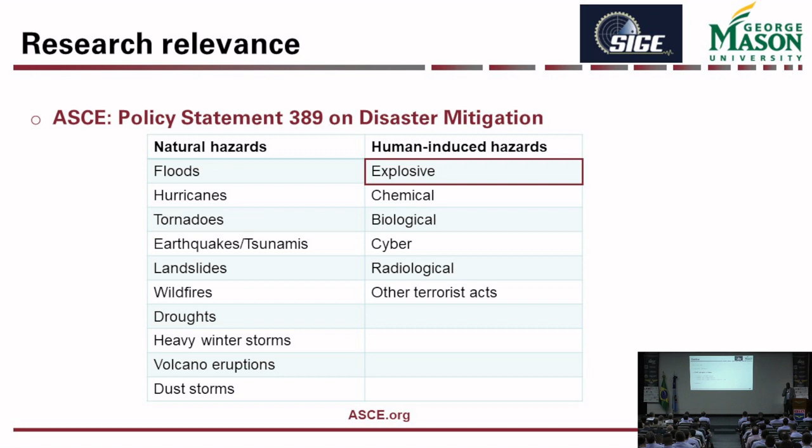Next I'll tell you about our underwater explosion research at George Mason. We've been working on this for the last 3.5 years. I'll use the word UNDEX instead of underwater explosion as shorthand. The project was funded by the Department of Defense, through a division called the Defense Threat Reduction Agency. The need was to determine high quality pressure data when we have explosions underwater.

At George Mason, we had a simulation platform called FEFLO, which has been validated for many years to capture the impact of air explosions on structures. The goal was to expand that simulation to capture underwater effects.

A little background about FEFLO: it was developed at George Mason University, with the main developer being Professor Rainald Lohner. Anything I present here, credit goes to Dr. Lohner, who is the original developer, though we work together on this project. FEFLO can model anything compressible or incompressible, and it has several equations of state, describing the relationship between pressure and volume for water, air, or explosives. The program was extensively benchmarked with test data, and our goal is to expand it for underwater explosion.

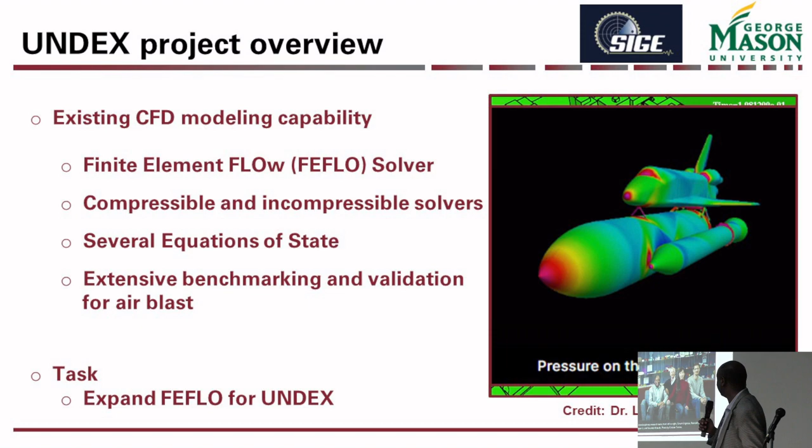So our task was to expand this for underwater situations. For this project, our research team has 2 professors, 1 postdoc, 1 PhD student, and 1 MS student. My PhD student, Jacob Sanders, isn't here, but we are 5 total, and all 5 of us were born on different continents. I was born in Africa, Professor Lohner was born in Germany, our postdoc Lin Chua Li was born in China, and Facundo was born in Argentina, representing South America. Jacob Sanders is from the US. So we have 5 different continents, 5 different people working together on this project.

So how did we start looking at underwater explosion? The first thing we did was look at whether we had the capability to predict how much pressure would be generated in a water body without any structure present, because you don't want to jump into studying structures without first understanding how pressure is generated just underwater. We call that the free field underwater case, where no structure exists, and I'll talk a bit about that next.

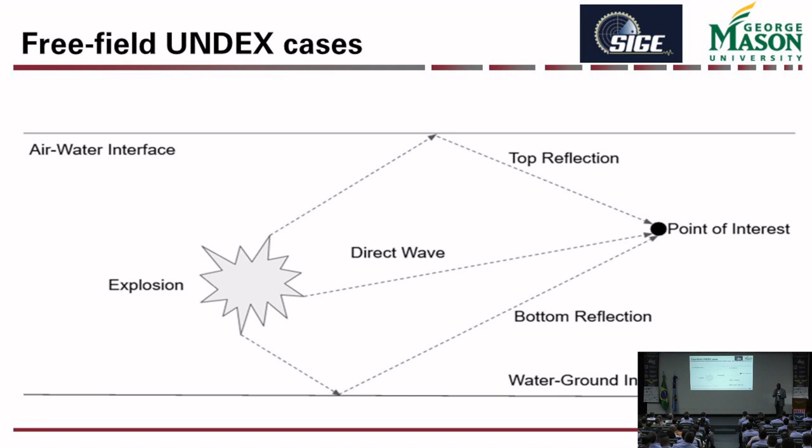So compared to air explosion, there is an additional layer of complexity when you're looking at underwater explosion. Later on, I'll show you our simulation for a free field case.

So how do you determine free field pressure? Well, you can do experiments. Some researchers have tried to do experiments in a very large water tank. They fill it with water, suspend an explosive, and put sensors at different distances to measure how much pressure is coming to the point of interest. We have also seen people doing tests in a quarry, maybe abandoned mines. They fill it with water, then put sensors at different distances to capture pressures.

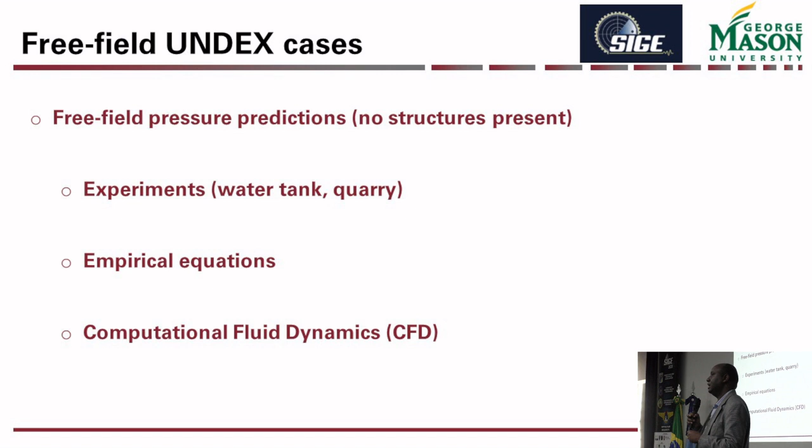Now, of course, there are some researchers in the old days who have done a lot of these tests and come up with what are called empirical equations that allow you to predict how much pressure you have just by knowing the explosive weight and the standoff distance. And nowadays, we also rely heavily on computer simulation - computational fluid dynamics, using equations of motion to model transports in the water body.

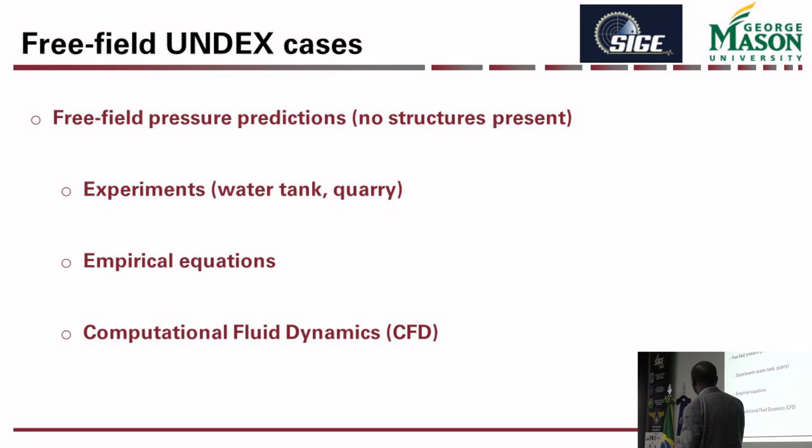So what we did first is we looked at existing literature. There's very good work done in South Korea by researchers Moon et al., relatively recent work. They tested underwater explosion in a 22-meter diameter tank, 15 meters deep. If you think about the size, it's huge - 15 meters is like 5 stories, more than 5 stories. What they did is put explosive at 5 meters from the surface of the water tank, then put sensors.

So they put sensors - this is the center - at 2 meters, 4 meters, and 6 meters, and they have quality data. So we used this data to initially validate our very preliminary computational algorithm. I'm not going to bore you with the mathematics behind it, but I'll show you some of our results.

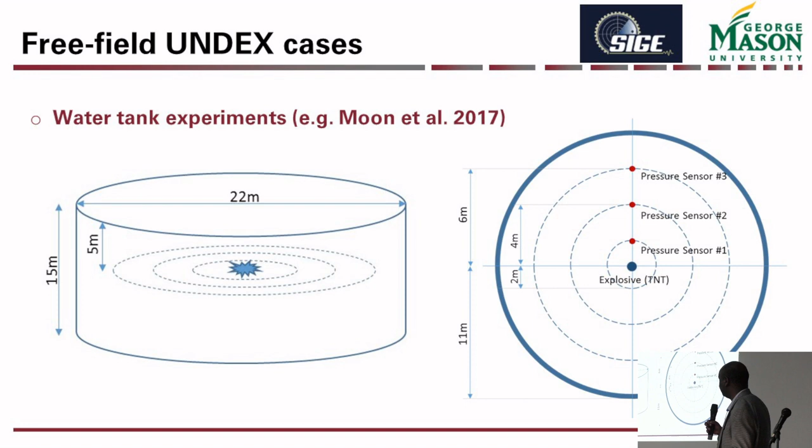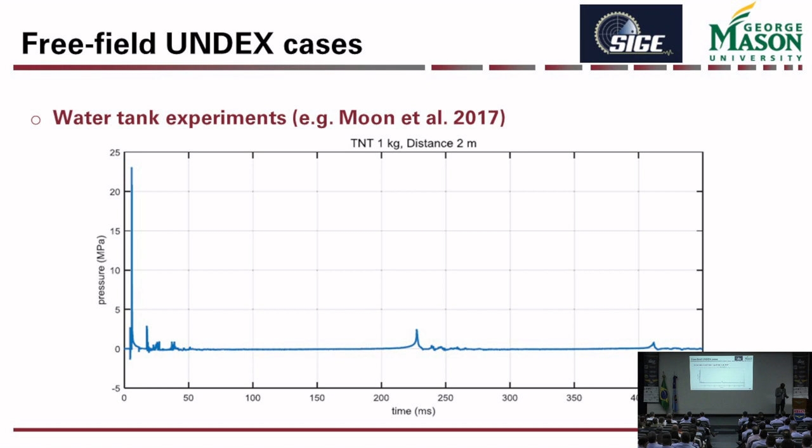Now, as you can see here, these are results for different distances at a standoff of 2, 4, and 6 meters. And clearly, as you move farther away from the explosion, the pressure will decrease rapidly. But I want you to remember some of these peak values: at 2 meters, our peak was 23; at 4 meters, about 11; and at 6 meters, we have about 7 megapascals. So still a significantly large pressure compared to standard atmospheric pressure.

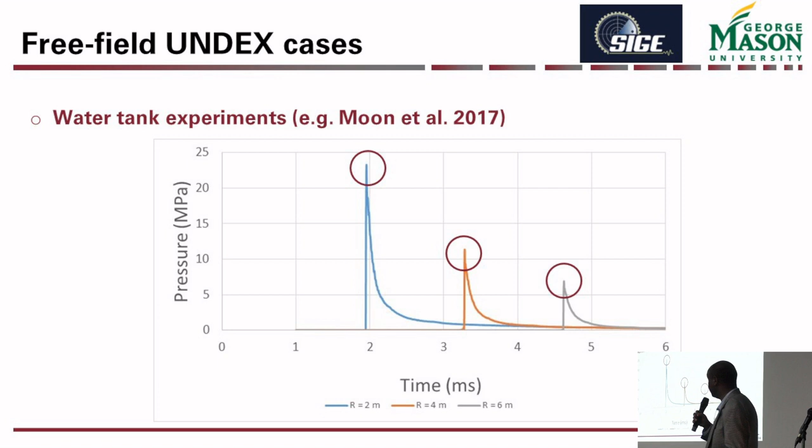We also looked at some of the tests done in a quarry. One of them that kept coming back, and was used to validate other computational programs, is called Kwon and Fox. What they did is fill a quarry with 40-meter deep water, then put a 60-pound HBX1 charge.

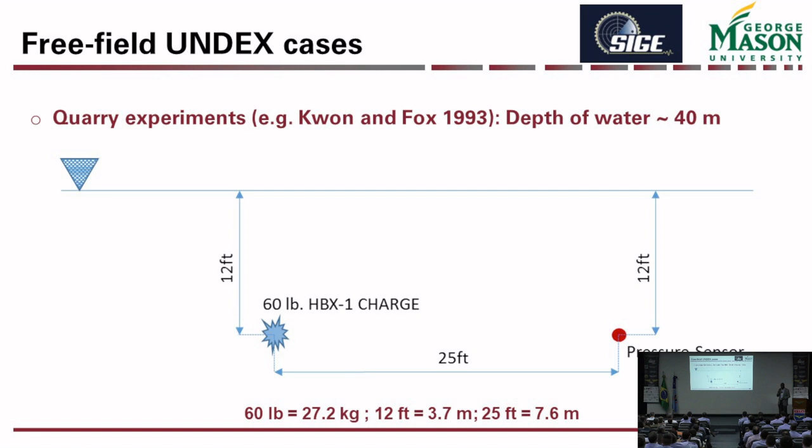Then they put a sensor 25 feet away. I'll give you the conversion units here since I know you use SI units. So it's about 27 kilograms at 8 meters.

It's about 16. We looked at empirical equations. There are empirical equations that say we have a peak pressure and it goes to 0 very quickly. So if we can come up with some very simple mathematical function, people can predict how much pressure the explosion is generating.

A very simple exponential function. It is a function of the peak pressure and a constant value for a decay.

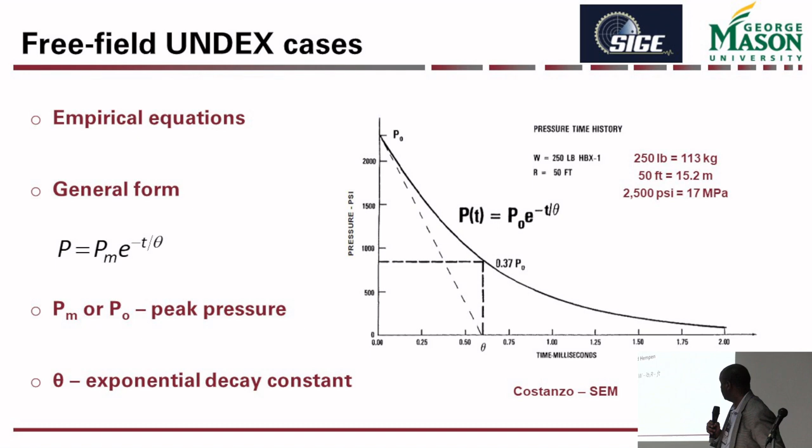Some of the empirical equations that we saw go back to 1964. There's a very famous literature by the guy called Cole. But there are also newer empirical equations if you start to look at literature. I'm here showing you just one of the equations from Cole. What Cole did is he did a series of experiments and came up with this equation.

So if you know your W, which is your weight of explosive, and R, the standoff distance, you can predict the peak pressure. And similarly, we have this equation called I. In the blast world, I is impulse. If you integrate the area under the pressure time history, you get an impulse time history. So how much energy is being delivered to your system is captured by your impulse.

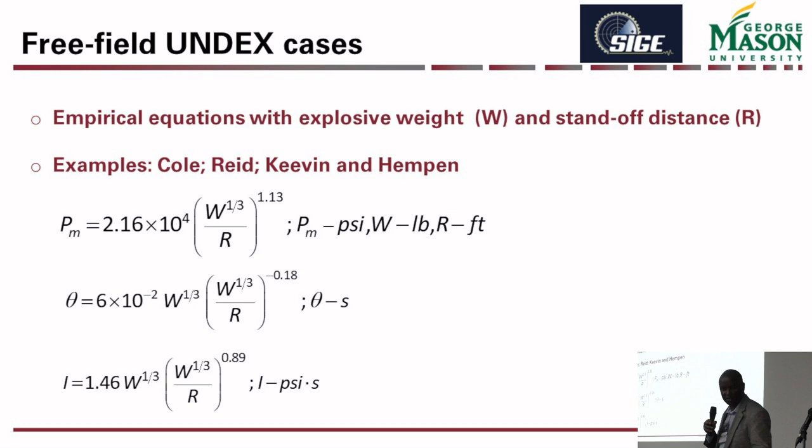So we did a very quick comparison between these experimental values and what the empirical equations are telling us. As you can see, this is coming from the Moon et al. large water tank experiment, and these three are from empirical equations. I think it's a very good prediction for an empirical equation, right? So like at 10, 10, 11, I think some of these empirical equations do a good job in predicting pressures.

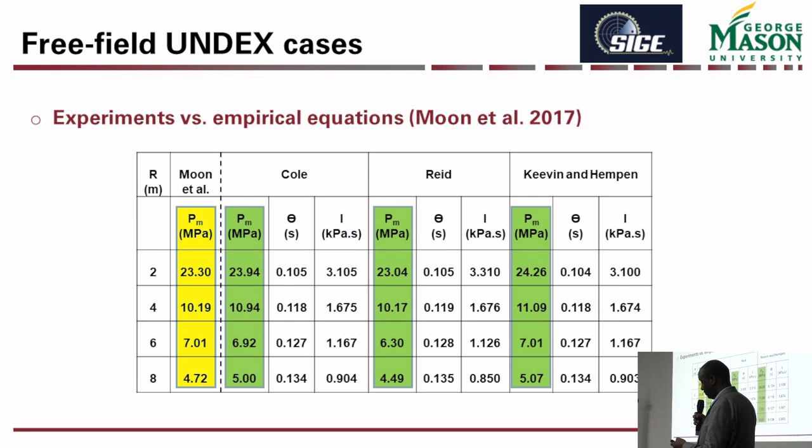We also checked the quarry results. The quarry results from Kwon, about 16 megapascals, whereas the empirical equations are predicting a little bit higher, again within 2 MPa.

So the reason why this is important for us is we didn't just want to expand our computational capability and claim that, oh, it works. We need to have some sort of checking whether our answers are correct or not, right? So it gives us some confidence in our computational simulation, which you will see later on.

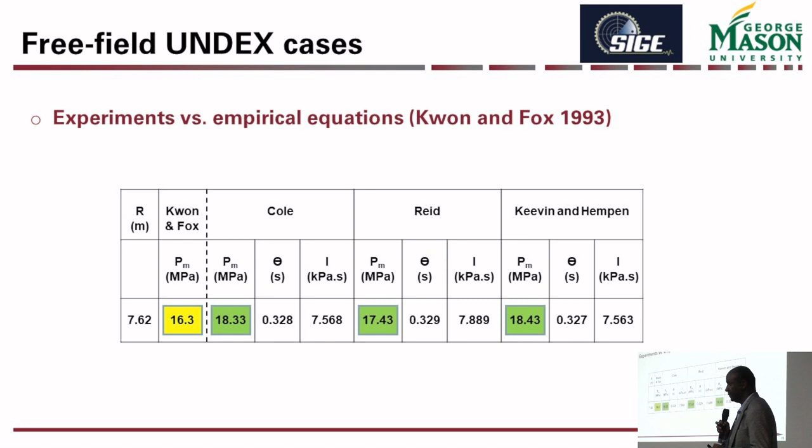So what we did really took us almost 2.5 years, and this was during the pandemic. Our postdoc, Lin Chuan, is very good with computers, and she did most of the programming and validating and testing to see if we can predict this in a 2D and 3D environment, because the empirical equations have their own limitations.

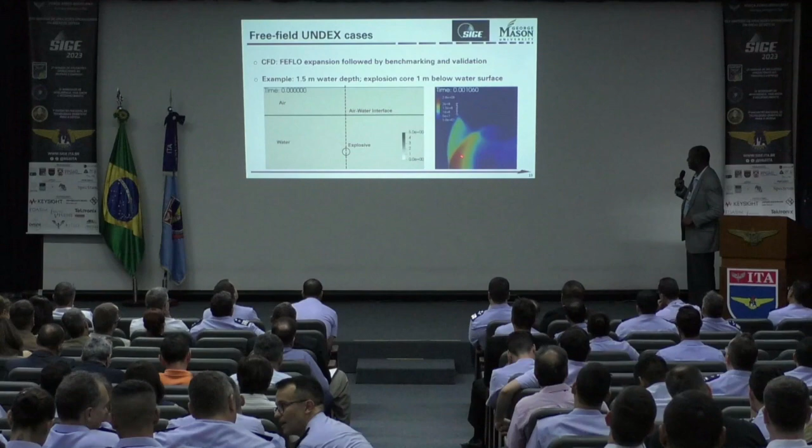Now, on the right-hand side, instead of showing you the blast everywhere, I'm going to cut the model halfway, and I'm going to show you only half of the result because of symmetry. So we're going to look at the left side of the pressure expansion. Again, remember this is an interface, here is air. The different colors are telling us the magnitude of the pressure.

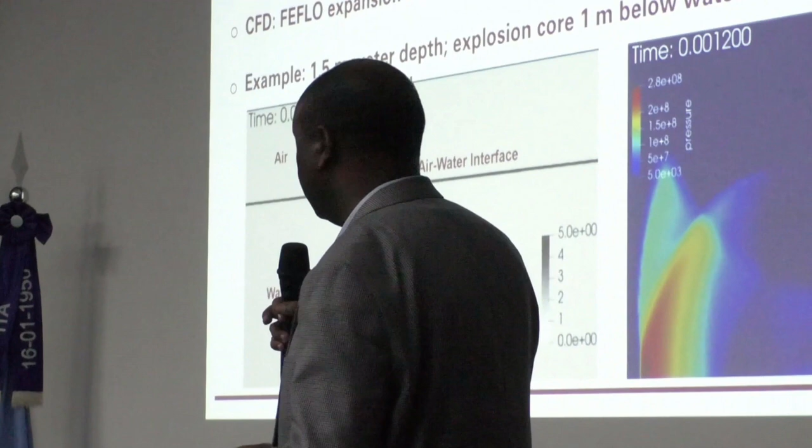So unlike the empirical equations, in our model we can do a lot of these simulations. We can check if those empirical equations work outside of the bounds. We can develop new equations by running many of these simulations.

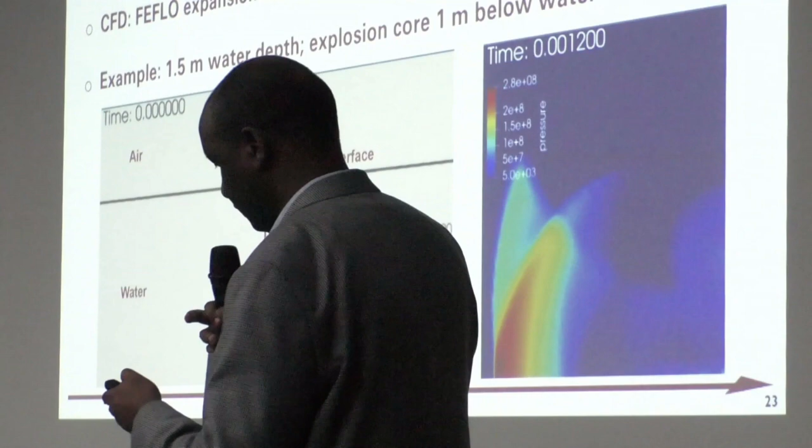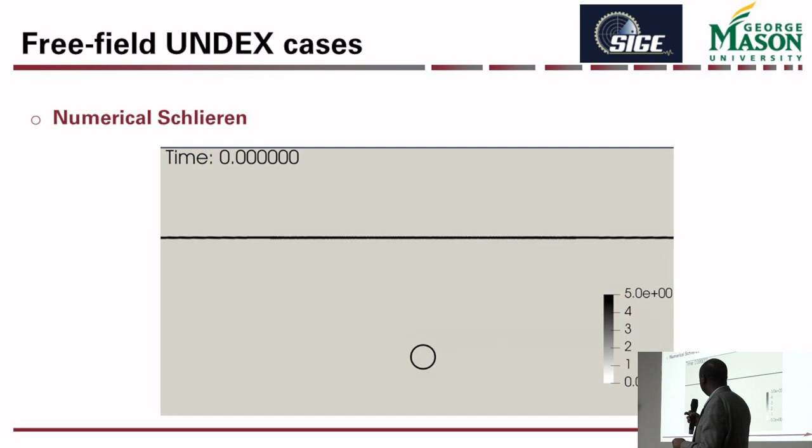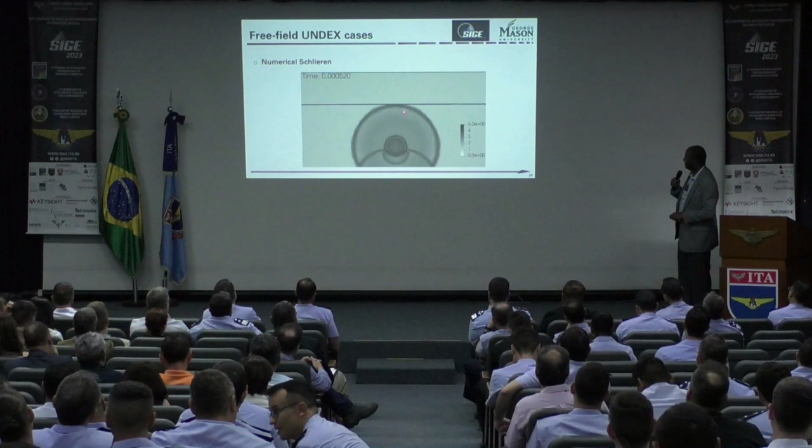But what is interesting for you to see, I think, is if you slow down the movie and look at how the pressure wave expands. So I'm starting out with the explosion here, and this is a nicer picture to show you that the pressure is reflected back, and the interface now comes down. A little bit will go to the air, but then it's a complex dynamics here, and that's all captured by computational fluid dynamics.

It looks nice, but really it took us more than 2 years to program these differential equations.

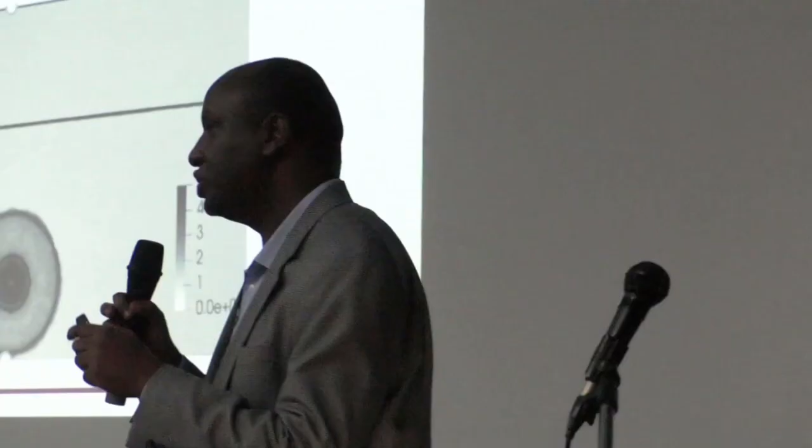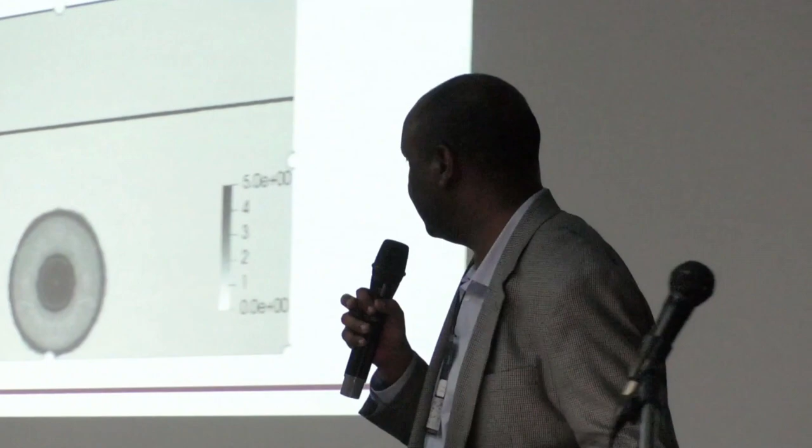And maybe a smaller, just if I show you a still picture, this is a radial expansion of the explosion, and it's about to hit the bottom floor, okay? And then the next one will be after it hits the bottom boundary. You can see that again, that reflecting back and going to the explosion core.

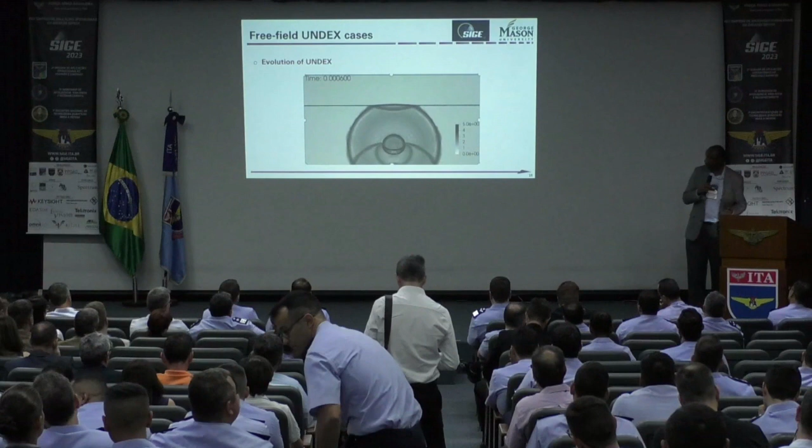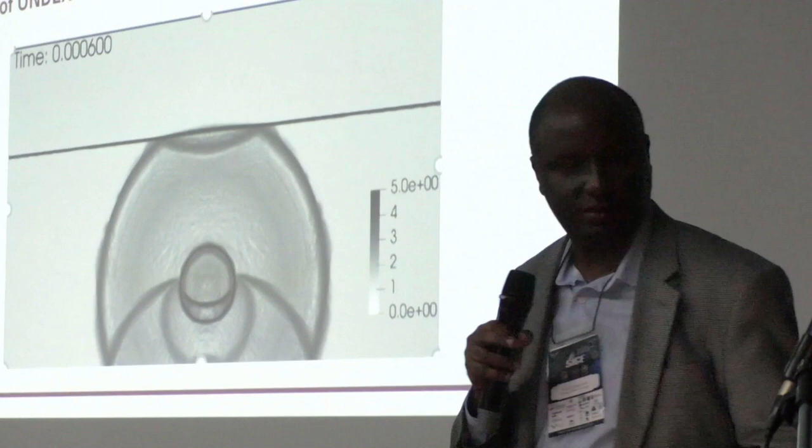And then the next still picture I'm going to show you is once it hits the interface, the pressure comes back down. A little bit will go to the air, but not a whole lot. And then here you see the continuation of different waves interacting within the core, outside of the core, and within the water, and some, now clearly you can see some pressure going into the air as well.

So once we felt comfortable, at this stage we felt comfortable that we have a tool that will allow us to look at underwater explosion, but what I have shown you so far is there is no structure, right? It's only pressure prediction. So the next step was we have to look into the interaction of a blast wave with a structure. And a structure could be a ship, it could be a dam, it could be a column.

But in terms of testing, we started out very simple models. And our project did not involve any experimental work. So we have to depend on published peer-reviewed papers. And we found out a very good paper that looked at the interaction of underwater explosion with cylinders.

So in this case, it's an 8-meter cylinder, 0.5 meter in diameter, and then the explosive was put at 0.25 meter. The researchers are Nguyen et al., and they use 8 kilogram TNT very close to the cylinder. So the pressure values, as you can imagine, would be very, very high.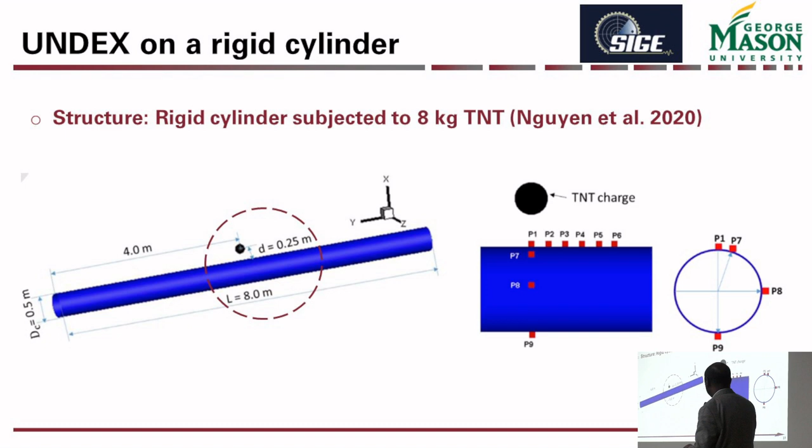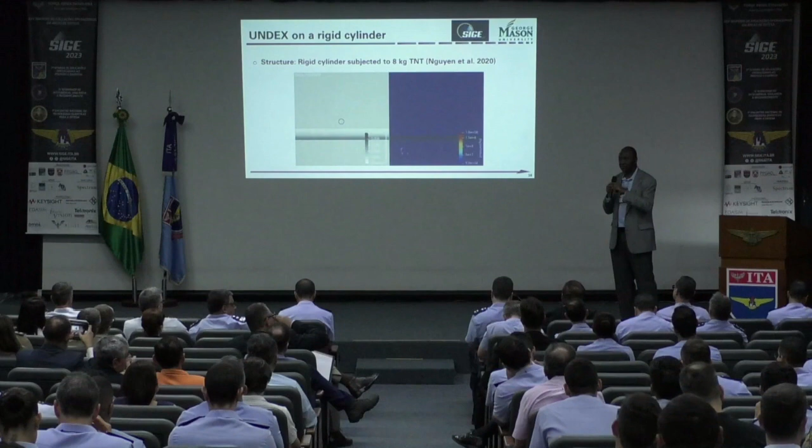So what we did is, they did the test, they have the pressure time histories. We used our model and we ran this simulation, and then we have our numerical stations exactly at those locations. We put 9 stations, and we measured our pressure, compared it to Nguyen et al.'s pressure. And this will show you a quick video.

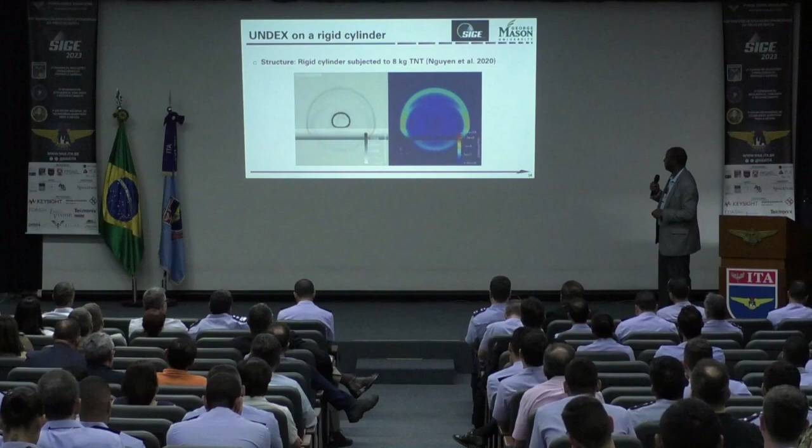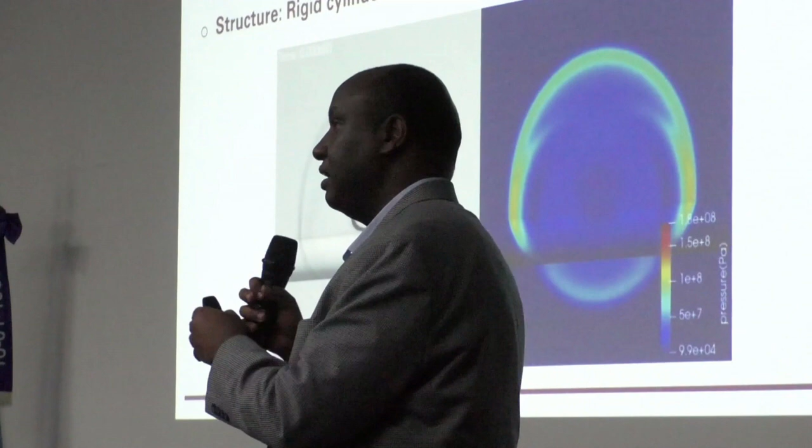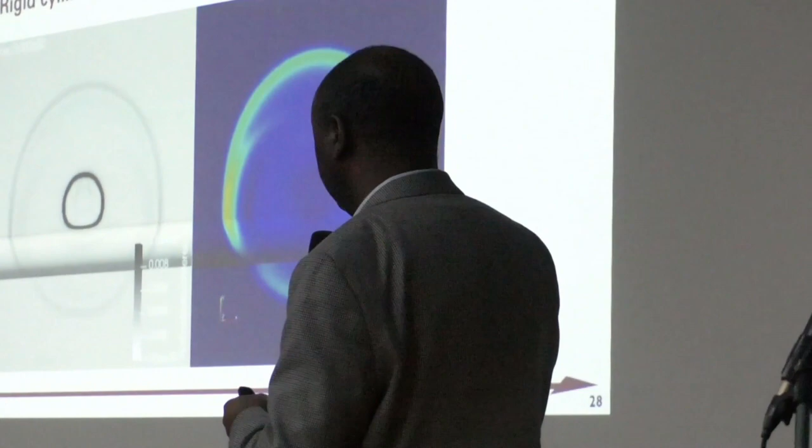So again, the left one is easier to see. It's a camera trick, we call it Schlieren, whereas the real pressure is on the right-hand side. So again, we can freeze this in time. We can measure, for example, Nguyen et al. reported pressure only at certain locations where there is a sensor. In our simulation, we can look up pressure at any point that we want. So again, computational fluid dynamics gives you a lot of power in looking at the different physics of the phenomenon.

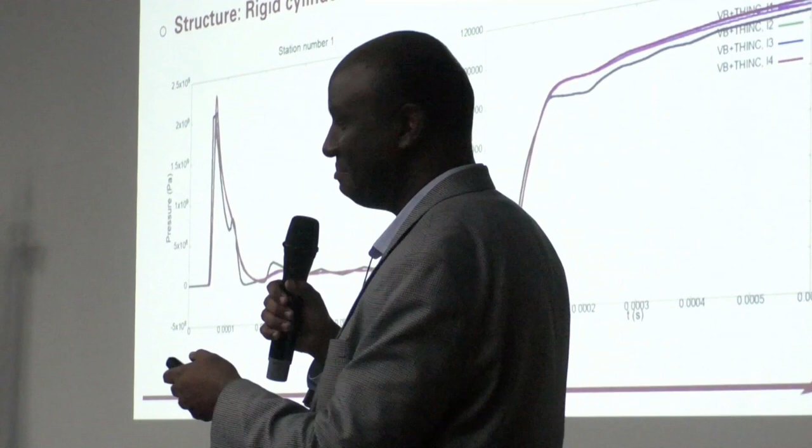Just to show you, I'm not going to show you all 9 plots. It will be boring, you'll be looking at the same plots. But a couple of interesting places - of course, the first one would be station number 1. That's directly below the explosive.

And as you can see, the pressure is tremendous, it's about 200 megapascals. But remember, this is 8 kilogram at 0.25, okay? Now you may see, well, you have a lot of graphs. The one in black is what's coming from the literature, and these 4 plots are showing our 4 simulations when we're validating what we call the number of elements, or the size of our mesh, for running this model.

But again, our prediction was pretty good compared to - again, we didn't do this test, we're using a test that's already done. So we felt our results are reasonably good. On the right-hand side, what you see here is the integration of the pressure time history. It gives you what's called the impulse - that's the total energy delivered in your system. Again, a very good comparison from the literature.

I'm showing you another one at station number 3. Remember, station number 3 is 0.1 meters away, so it's at 0.2 meters away. You start to see a reduction in pressure, from about 220 megapascals, now about 150. So as you're farther away, the pressure will be smaller, and also the impulse will be smaller.

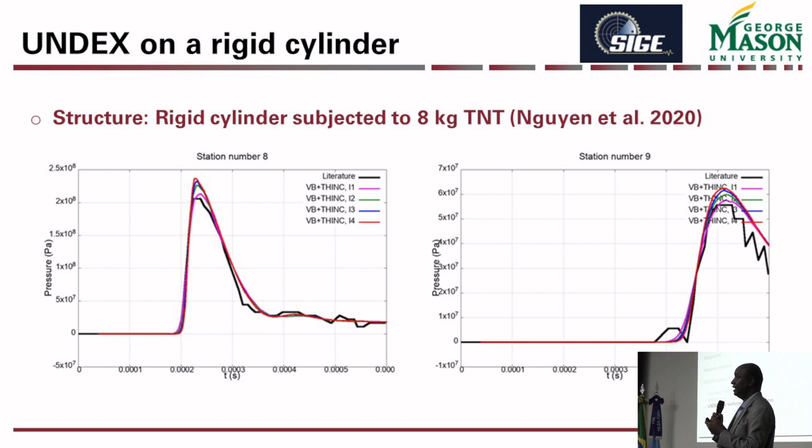So this gave us confidence that our tool can analyze an underwater explosion subjected to a cylinder. But this cylinder has a unique property. And what our goal was at the end of the day was looking at reinforced concrete columns, and I'll explain why we're looking at that.

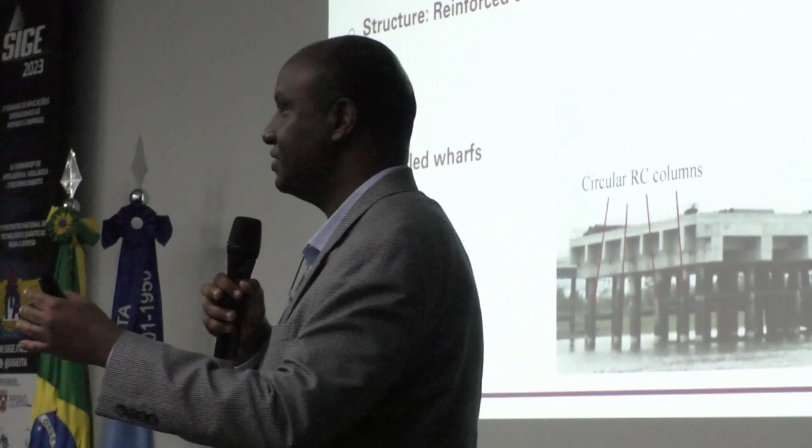So if you think about high-piled wharfs near our ports, they are usually very easily accessible. So if people want to do harm to this type of structure, it's actually very accessible. So we're tasked to generate pressure time histories for different configurations of reinforced concrete columns, circular columns, rectangular columns, and also at different standoff distances, different explosive weights, different depths of detonation. You may have a detonation near the air-water interface, or at some distance within your water body. So the whole idea was to generate a matrix of pressure time history values for different combinations of the items I talked about.

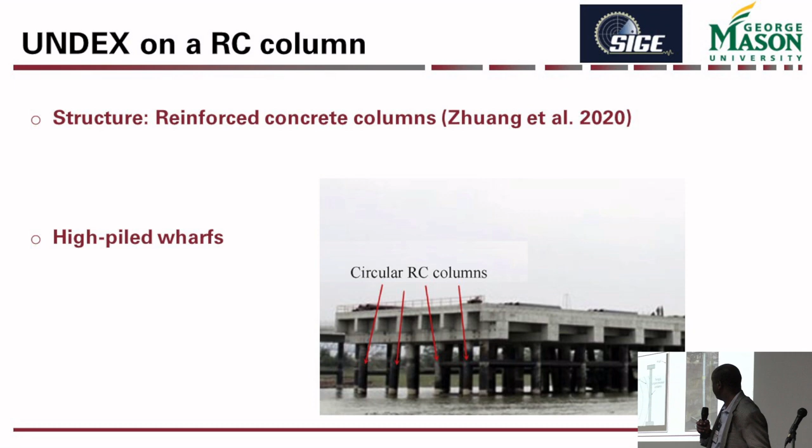So for this particular case, what we did is we looked at one data set that's already peer-reviewed. These researchers did a test in a water tank, 10 meters in diameter and about 3 meters deep. They put a simple reinforced concrete column, filled the tank with water, and detonated explosives. But these are very small explosives, on the order of 1 kilogram. So we have this test data available for us.

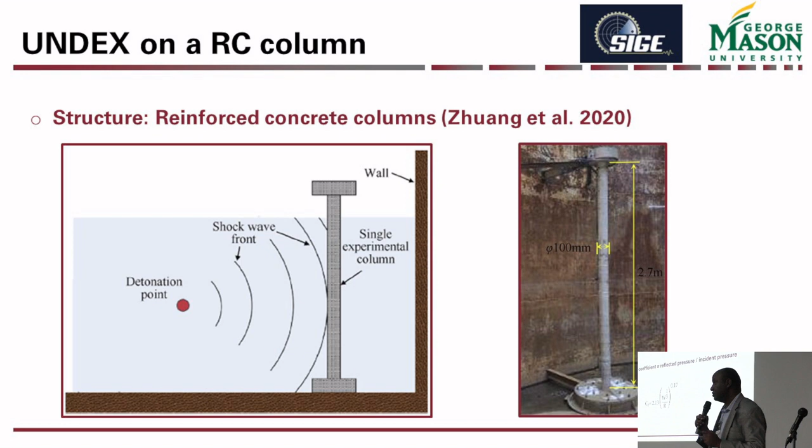And also, because now they have a structure, they calculated what's called a reflection coefficient. Whenever you have a structure, the pressure will significantly increase compared to a case where you don't have a structure. It's counterintuitive, but what the structure does is, the pressure comes, gets reflected back, and the shock event is also happening in a tank. So you have more shocks summing together and hitting your structure again, a lot of reflections coming. This is reported in the literature, so we have at least some guidance to check if our work is correct or not.

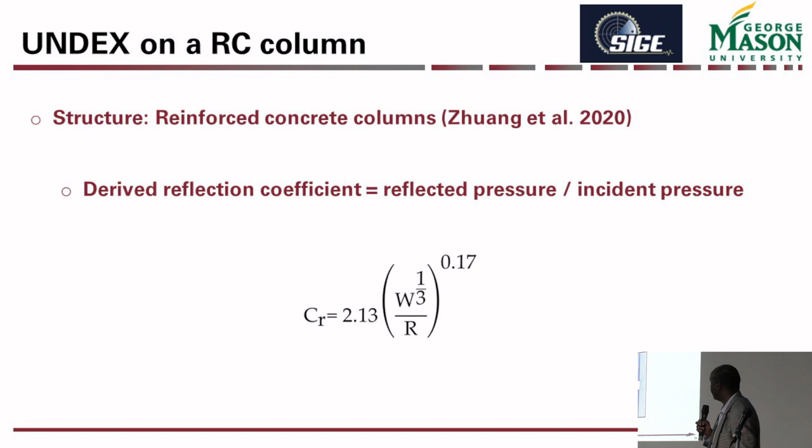This is one of our models, where, as you can see, it's very hard to see here, but we have a column. Can you guys see the boundary of the column here? It's a circular column. And then we have an explosion at 50 centimeters from the face of that column.

So as the explosion detonates, we're able to calculate our free field pressure. And then when the explosion hits the structure, we measure what's called the reflected pressure. So our goal is to see what our simulation says about the reflected pressure divided by the free field pressure, and compare it to the literature available in Zhuang's test.

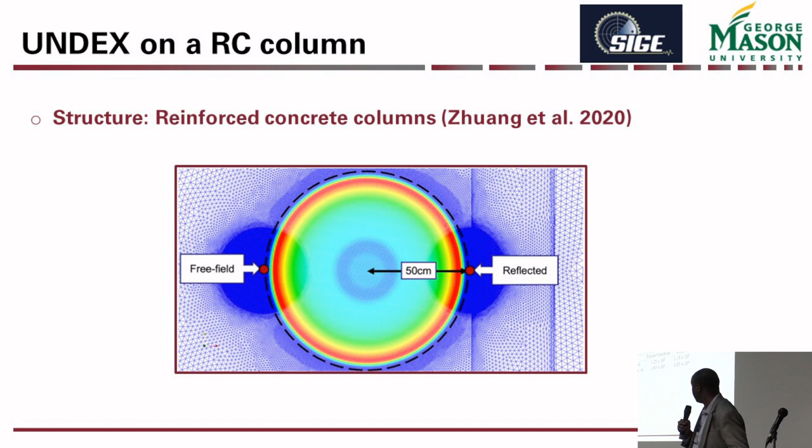So some of our comparisons are pretty good. This is our result. Remember, at the free field, we can use empirical equations. This is the prediction from an empirical equation. They're very close to each other. So we're relatively happy with our findings here.

Now, when we put the structure, which is the column, again with 1 kilogram explosive at 50 centimeters, our method shows that the reflection coefficient, meaning reflected pressure divided by free field pressure, was about 2.1, whereas Zhuang's experiment says 2.4. So our prediction was a little bit lower, but the challenge is, we did not do this test to say Zhuang is correct or not.

We didn't do our own test to see if we'll be getting 2.05, but again, very close, without having our own experimental data to validate this work yet. So relatively close ratios between the two.

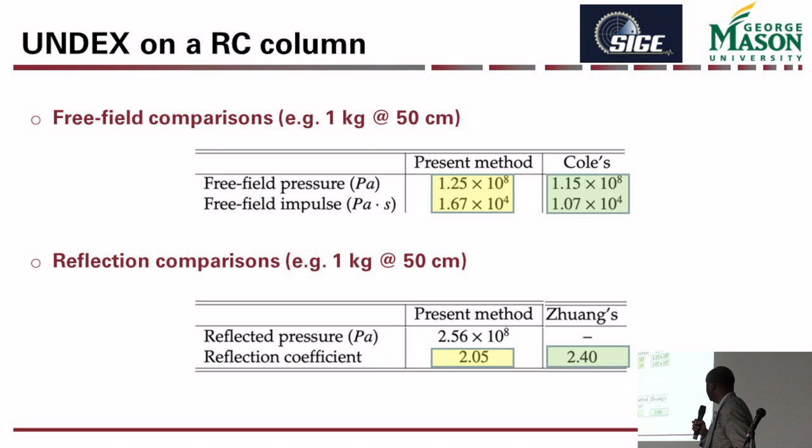After that, we felt very comfortable that we can run simulations on steel plates or reinforced concrete columns. Here is one example for you that shows a good movie.

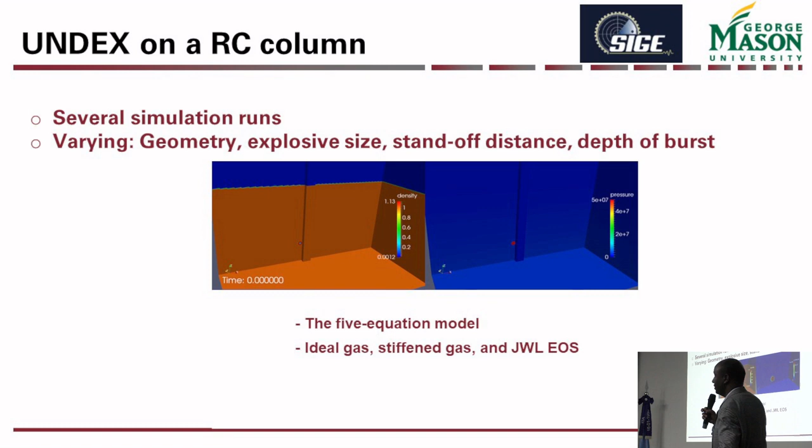On the left-hand side, what you see here is simply the density—the red you see is water, which has a density of 1 gram per centimeter cube. Then what you see here is air, and down here there's an explosion starting. On the right-hand side, it's simply showing you the pressure generated at different points within the medium.

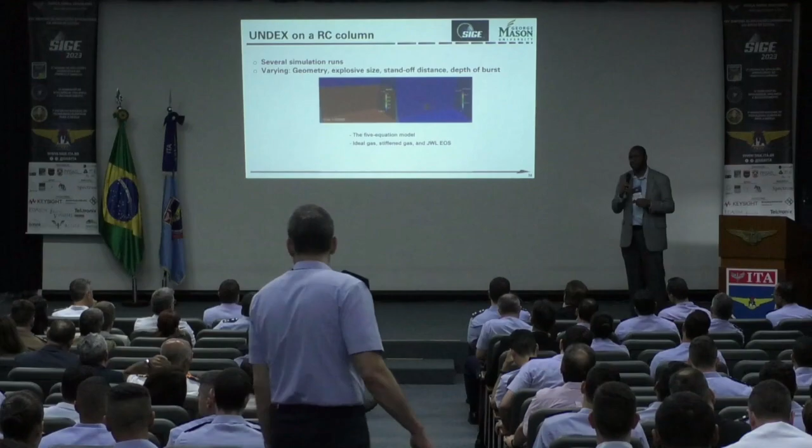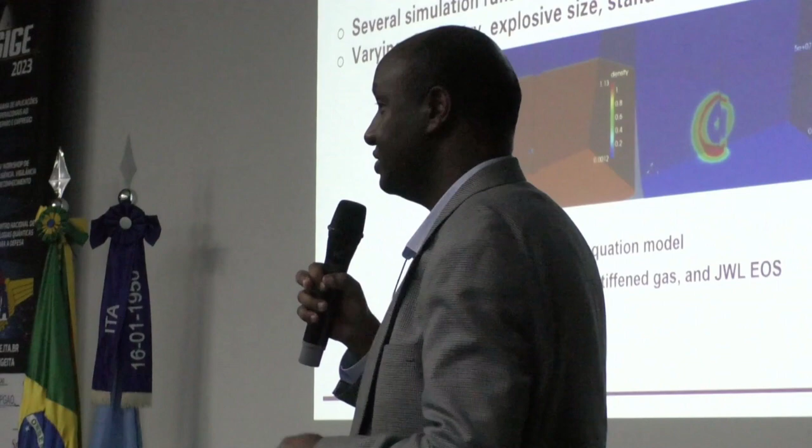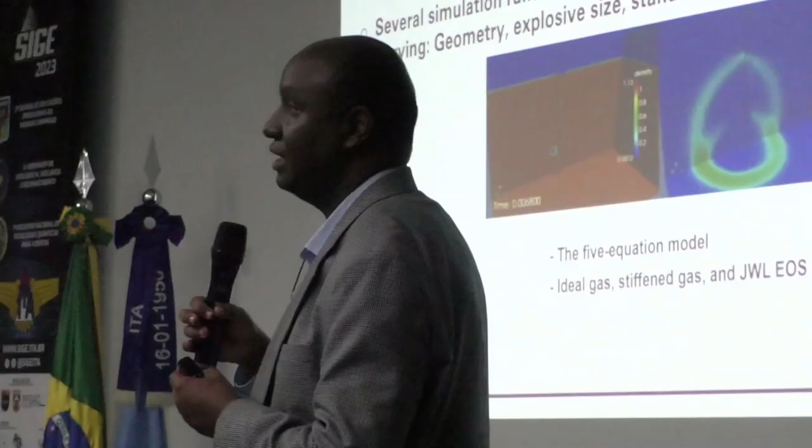For those interested in the mathematics behind it, there's a model called the 5-equation model: conservation of mass, conservation of momentum, conservation of energy, and then we have to come up with equations of state. Different equations of state for the explosion and for the gas, because when the explosion happens, gas is generated, so we need an equation of state. For the explosion itself, we have a famous equation of state—at least on the US side, we use JWL, Jones-Wilkins-Lee model. It's heavily documented in literature.

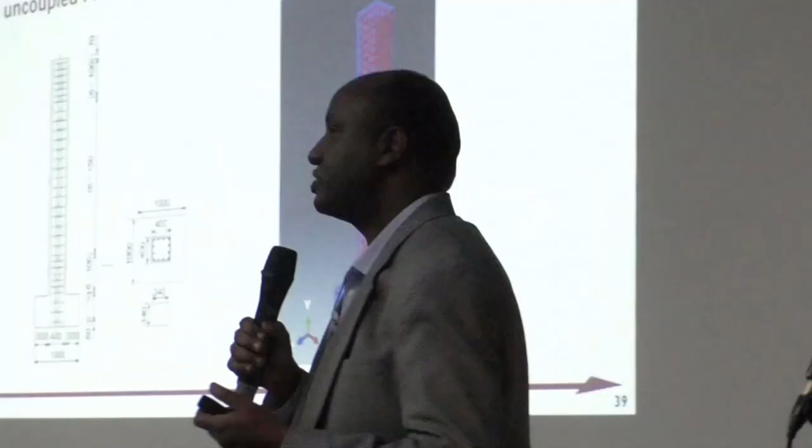So you may ask, okay, you have all these pressures generated, but what is the value of having those pressures? Well, at the end of the day, I have to be able to assess whether that pressure is causing damage on my structure or not. So once I have pressure, I have two options.

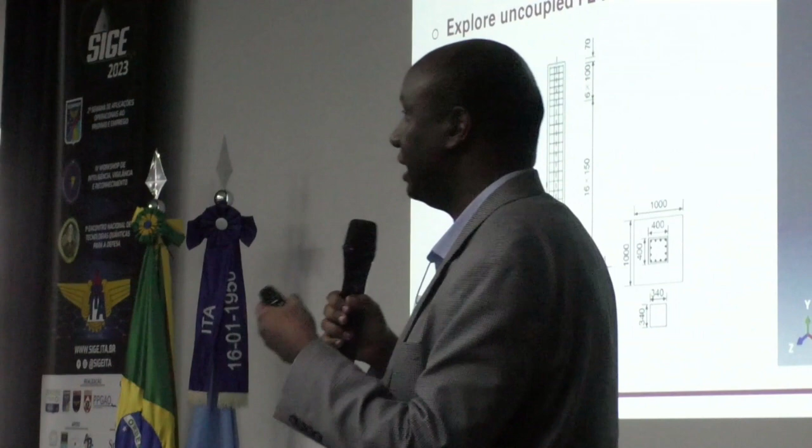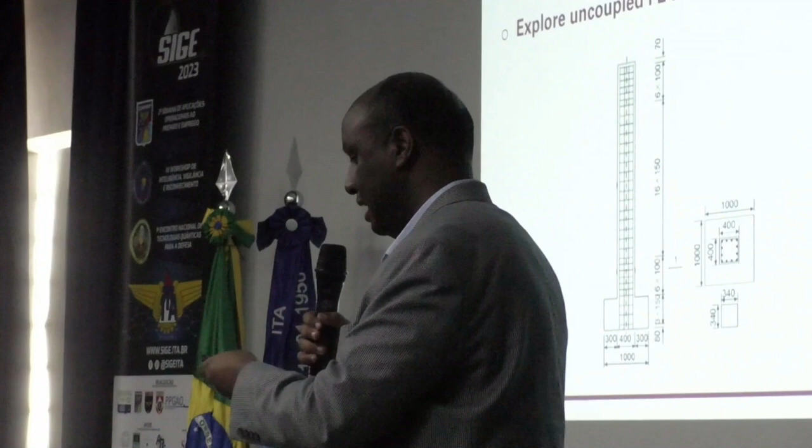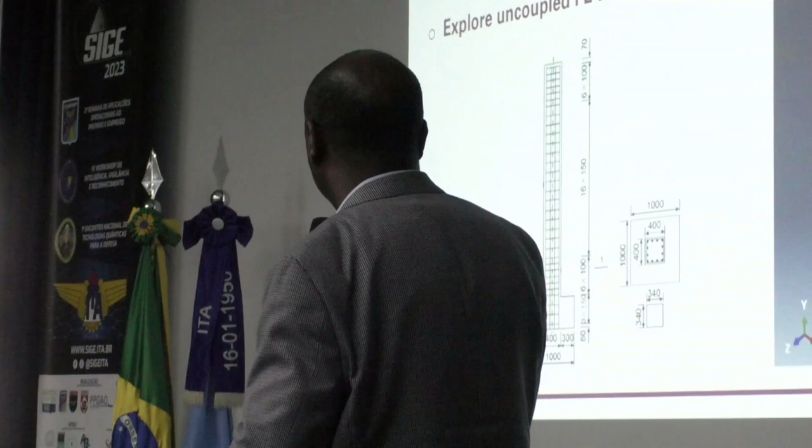I can take that pressure and take it to another program heavily focused on structural response—in this case, we explored a program called Abaqus. So we took our pressure and put it into Abaqus to see if this column, for example, is surviving that particular blast event. This was not required by our sponsor, but we advise the students to do additional work to challenge them.

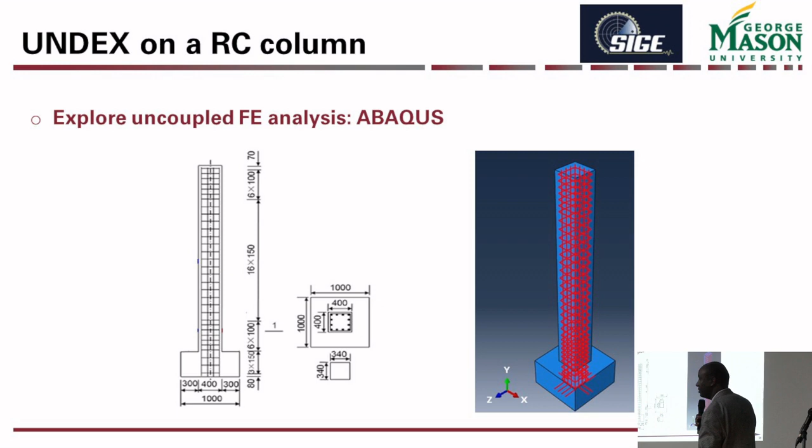In this particular case, you see a very simple reinforced concrete column. We try to model it as exactly as it's built—you see the vertical reinforcement and stirrups.

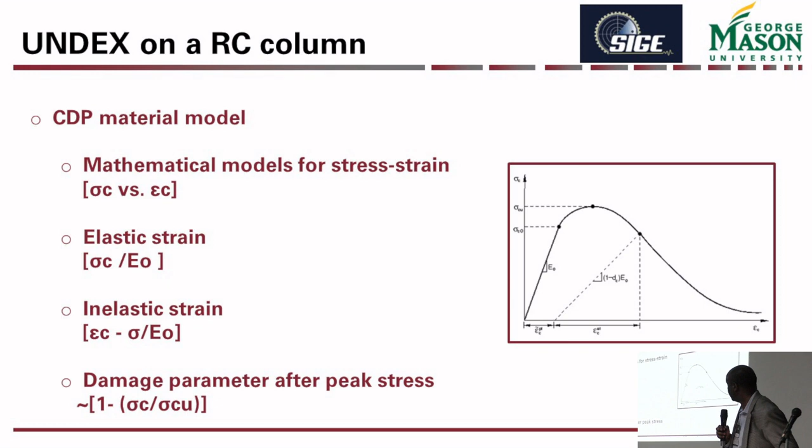Our typical challenge in looking at structural response is understanding the behavior of concrete when it's subject to dynamic loads—how does it respond? This is the stress-strain diagram for concrete. We do a little bit of study in our computer simulation to see how strong the concrete is, how it fractures for a given compressive load. That gives us the compressive strength of concrete.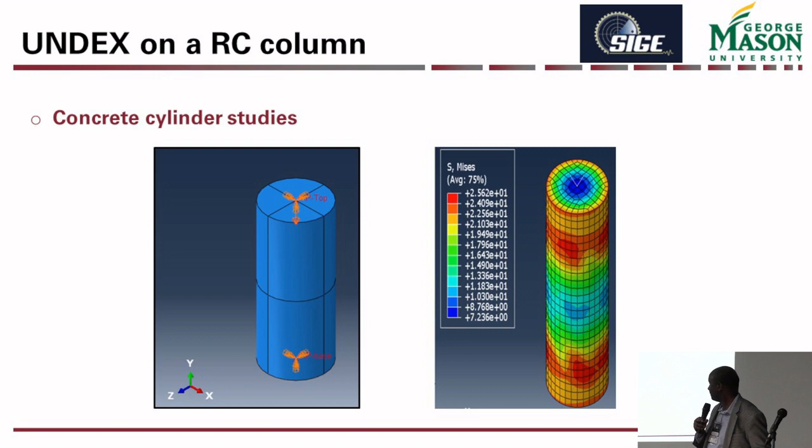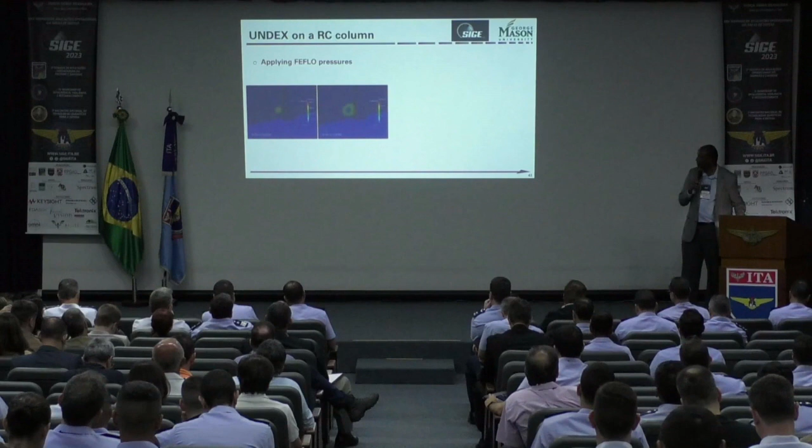Once we determine that, we have the ability to relate it to other parameters we need for our simulation. And then, once we are comfortable with our material properties, we run our FEFLO pressures at different times. This is one example for you. We have the ability to capture this pressure in time and space, and transport it to the structural software, and this is a preliminary result.

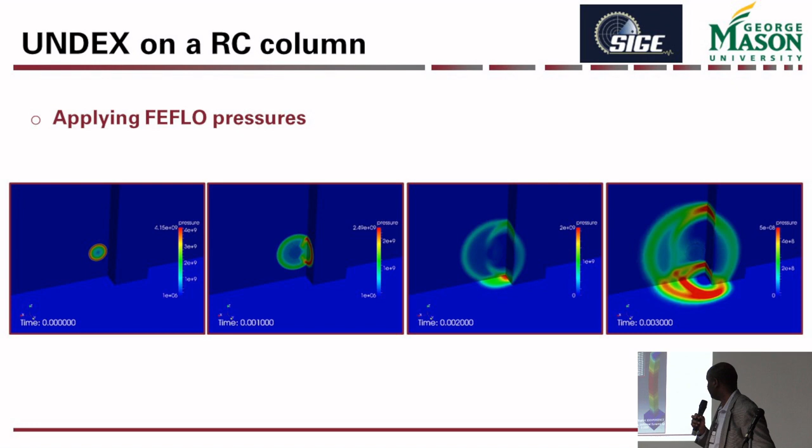It's not necessarily correct, but it just shows you that you can apply the pressure, and now you see the column is bending. So there is a response generated by the pressure coming to your column. Our students are still refining their models.

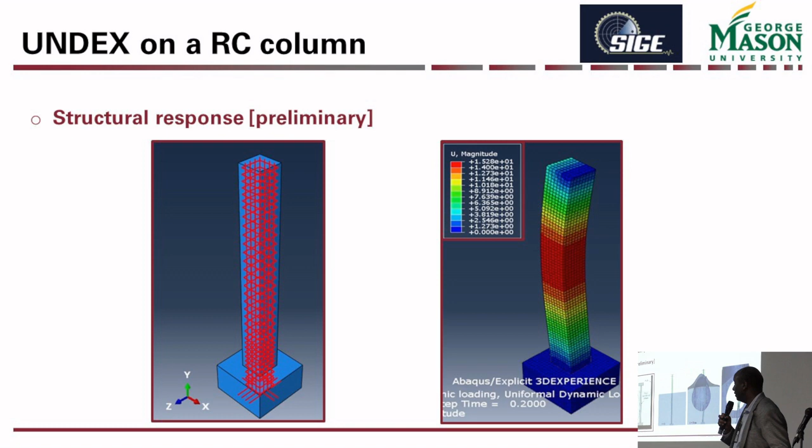Another question we typically get is, okay, you generate your pressure and take it to another platform to determine the damage, but can you do this in one platform? Can you generate your pressure and, within the same platform, also predict the damage? There are some softwares that will allow you to do that.

One of the famous ones is called LS-DYNA. Now, the only challenge we have with LS-DYNA is even if it's able to generate the pressures for you, you're relying on their capability to determine pressure, so you don't have control over whether that pressure is correct or not. We're not trying to cast doubt on the software, but having your own software allows you to predict pressure and validate whether it is correct or not.

If you make a mistake on the pressure, you'll make a mistake on the response. So the previous approach gives you more control on the quality of the response. But we're also conducting a coupled analysis to see if the LS-DYNA approach is better for doing everything in one software. But if we say this is good, then we're running out of business, because our program is FEFLO, and we have to look at the pressure also. So we're not going to lie, we'll report our findings, but this is also an approach you can use if you want to do a study in a coupled manner.

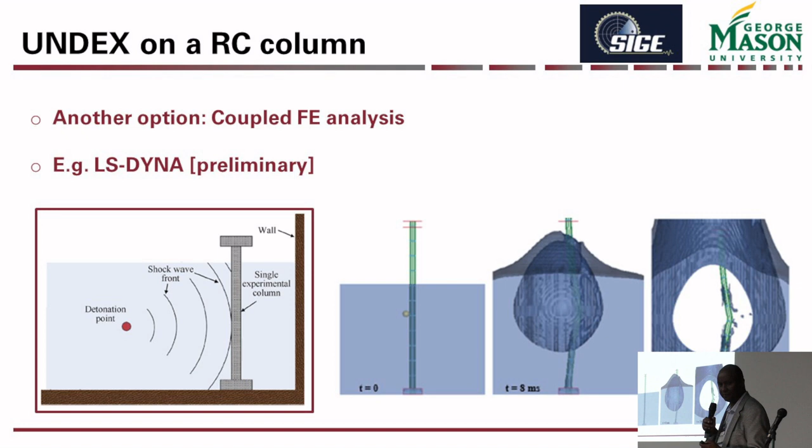In conclusion, our objective for this particular project was to expand an existing software at George Mason and build a capability to do underwater explosion analysis. We actually just completed the project on the pressure side, but our students are still working on the structural response side as an additional project.

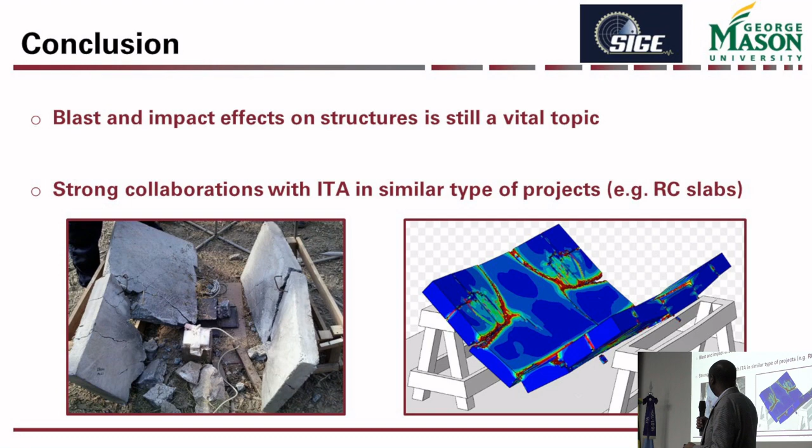I'll always say thank you to my students, collaborators, colleagues, and project sponsors. Without their support, we can't do this technical work. As part of funding resources, I always mention ITA, because Fausto was at George Mason for 15 months, so that's an in-kind support. We appreciate that. Thank you very much. That's what I have for you.